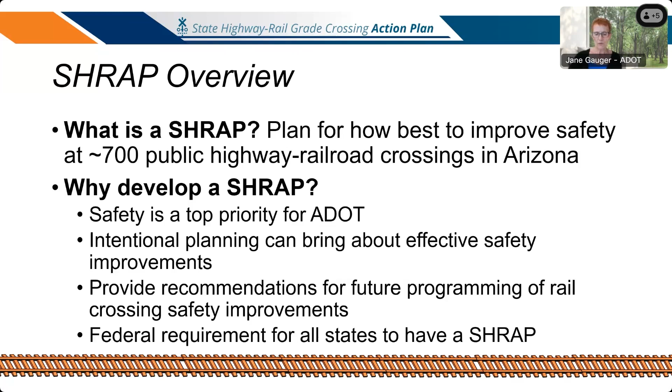So you may wonder, what is a SHRAP? It's a plan for how to improve safety at approximately 700 public at-grade rail crossings in Arizona. It was developed because safety is always the top priority for ADOT, especially related to railroad activities. The plan is designed to bring about effective safety improvements, provides recommendations regarding programming, and helps us determine the annual budgets for projects. It is also a federal requirement, and it must be updated every 5 years, covering safety at all public at-grade crossings in Arizona.

The goal of the SHRAP is to improve safety at public at-grade crossings for all modes of transportation that interact with trains. The objectives are measurable safety items: reduce the number and rate of incidents at crossings with active and passive treatments, reduce the number and rate of crossing incidents for all modes of travel, reduce the number and rate of incidents involving trespassers on the tracks - I'll explain more about trespassers in a bit - and reduce the severity of incidents at locations with reoccurring incidents.

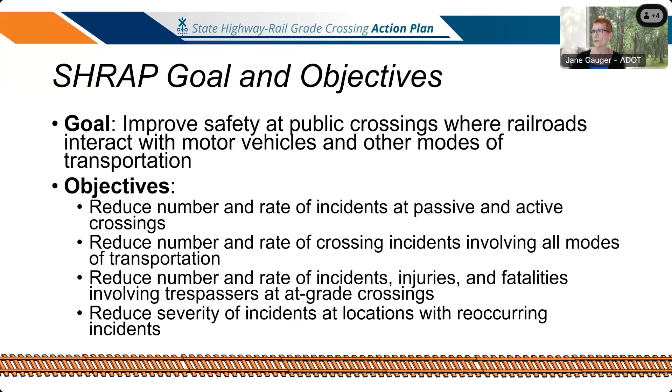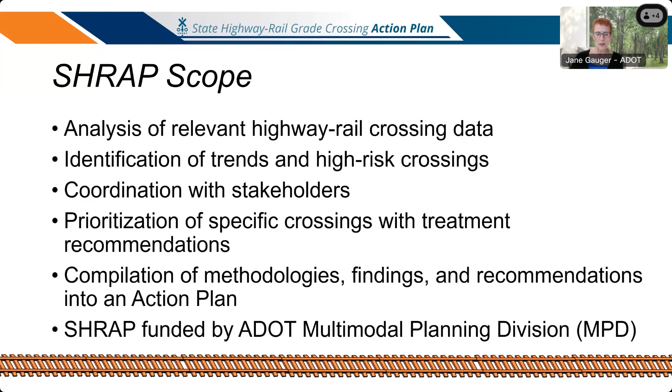To complete the most recent SHRAP, we followed these scope items. We collected and analyzed available crossing data for all crossings throughout the state. After analyzing the data, we identified trends and high-risk crossings. We presented our findings, coordinated with interested stakeholders, and then prioritized the crossings. We made recommendations for improvement, and compiled all the methodologies, findings, and recommendations into an action plan document. The SHRAP was funded by the ADOT Multimodal Planning Division, MPD of ADOT.

So I'm going to talk a little bit about pedestrian safety at railroad crossings, and this is where trespassing comes in. Pedestrians are trespassing, and they pose a safety risk if they walk along the tracks, cross the railroad tracks anywhere other than a designated crossing point, cross when the gate arms are down, or go under or around those gate arms.

These situations present a safety hazard, as trains are huge and really heavy, and they take a very long distance and time to stop. Trains can't stop in time if there are pedestrians on the tracks.

During the 4 years of the SHRAP, there were 14 pedestrian fatalities, all related to trespassing on the tracks. Just in the last 2 years, there's been an additional 14 pedestrian fatalities related to trains in Arizona. And just in the last 6 months, there's been 4.

The FRA is the Federal Railroad Administration. They oversee railroads in the US, and they are concerned, recommending and encouraging states to increase awareness and do safety improvements for pedestrians at crossings. So all across the US, there has been an increase in pedestrian fatalities at railroad crossings. It's a high concern for everyone.

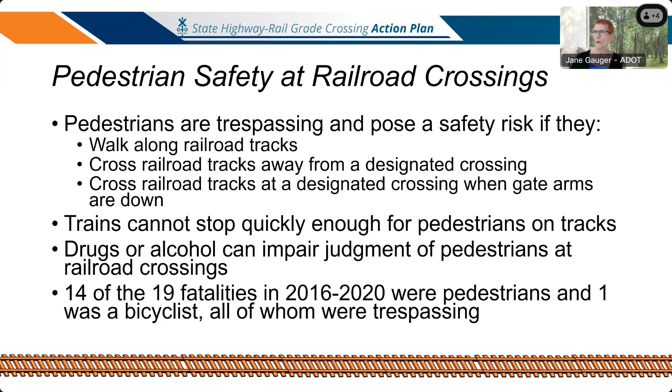This brings us to ADOT Utility and Railroad Engineering. We are the liaison between ADOT and the railroad companies. In Arizona, we have 2 major railroads. These are class 1, they go all across the US, and the trains are really long, now over 2 miles long.

Then we have 12 short line railroads. These are the local rail lines. We have 12 in Arizona, 8 are active, and there's 2 excursion railroads within that 8 count. And then we have 4 that are inactive.

We manage the statewide railroad crossing inventory, which is a requirement, and it accounts for all 700 crossings in the state. We also manage the Federal Highway Railroad Grade Crossing Safety Program. This is Section 130, you may have heard of it. So what Section 130 is, it's a funding program to provide federal money for projects to improve safety at railroad crossings.

It came about from the Highway Safety Act of 1973. During that time, there was a lot of concern from the federal government about the high number of accidents occurring at railroad crossings. So the nationwide funding program was established, and each state has their own Section 130 program that they oversee. The overall goal of the Section 130 program is to increase safety for all modes of transportation, including pedestrians.

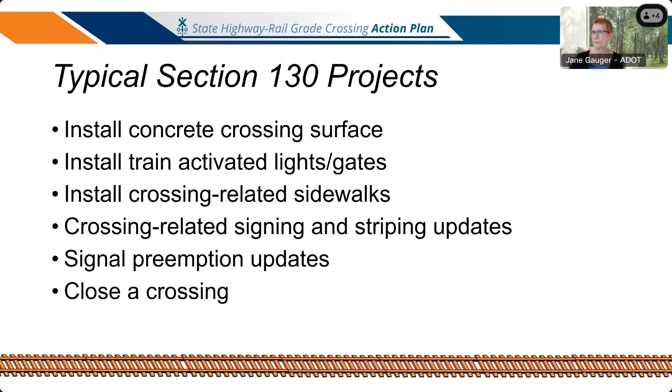Section 130 projects are selected and managed by Utility Railroad Engineering. The SHRAP has been extremely valuable because we ranked each of those crossings and gave them a risk scoring. This helps us determine future projects.

Utility Railroad is responsible for the oversight, coordination, and completion of all aspects of the Section 130 projects. That includes clearances for every federal project - you have to do environmental, right-of-way, and utility clearances, and agreements between ADOT and the railroad, and between ADOT and the local agency, which is the intergovernmental agreement.

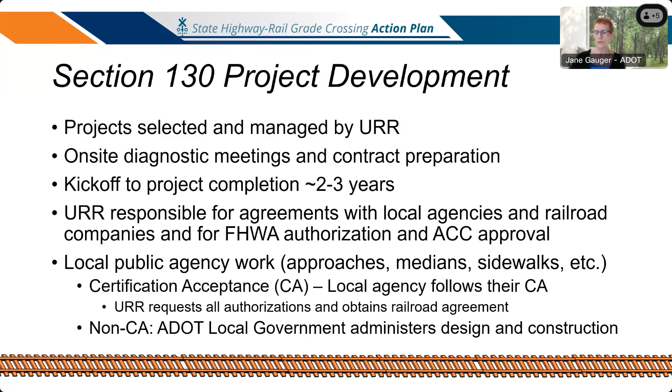We make sure the funding is in place for the project, and we also represent the local agency, the railroad, and the project for a hearing - an ACC hearing. In Arizona, the ACC oversees utilities, including railroads, so we have to go to a hearing to get approval to do any changes to that crossing. We take care of that.

This is an example of a Section 130 project - 35th Avenue and Harrison Street in Phoenix. The railroad does their own construction work, so they installed gates, cantilevers, and flashing lights.

The city of Phoenix did the civil work. They installed the concrete center medians, which allowed for an additional gate arm to be installed, and the railroad did that. But the city did the concrete, the sidewalks, the ramps, the signs and the striping. Typical duration of a project like this is 3 years; if it's more complicated, it can go longer.

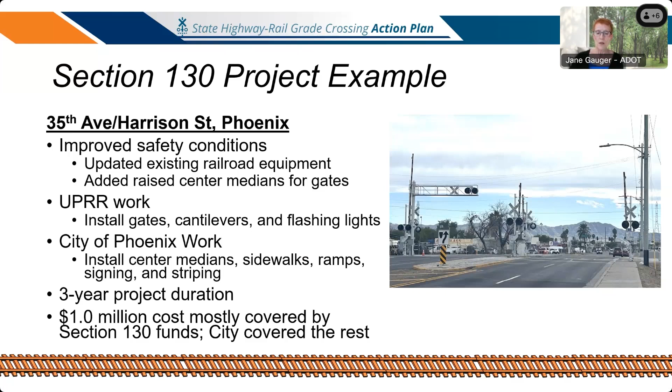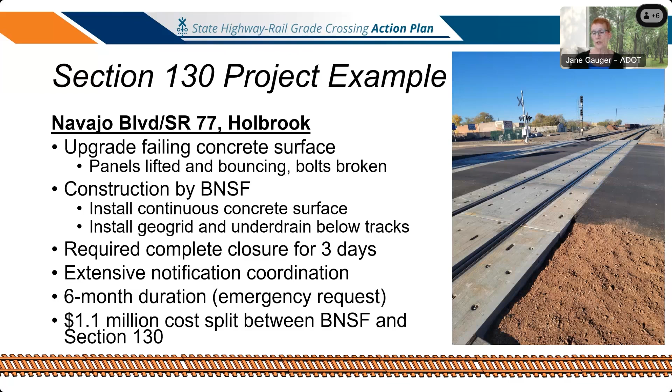This is a nice picture of what the concrete panels look like on that concrete surface. In this crossing, the surface was failing and they did not think it was going to last through the winter, and this is the only crossing for about 180 miles, so they needed to close the road for 3 days. Extensive notification and coordination allowed us to complete the project in 6 months at a cost of just over $1 million. Very successful project.

This shows the Central Yavapai Metropolitan Planning Organization's map, and we have one project, one crossing in your boundary. We just completed a Section 130 project here, and I have some photos.

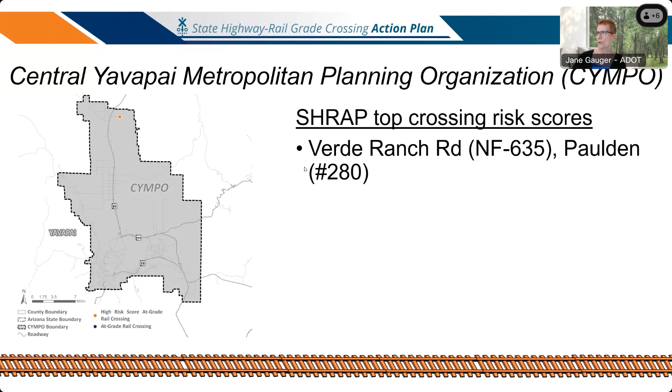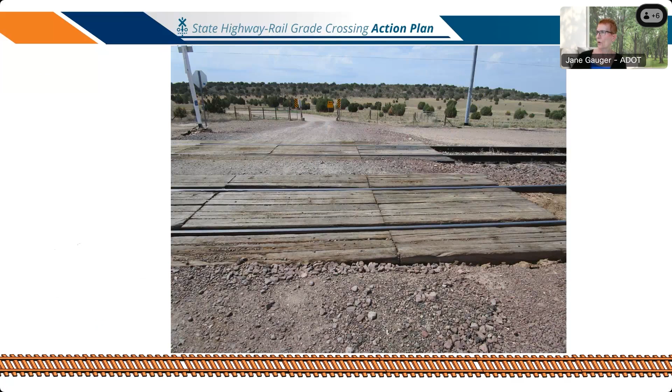This is Verde Ranch Road, east of Paulden. This is what the crossing looked like before - it was gravel surface, very narrow, with old timber surface. This shows how narrow it is - you couldn't even get 2 lanes to go through together, and the cattle guards were very narrow too.

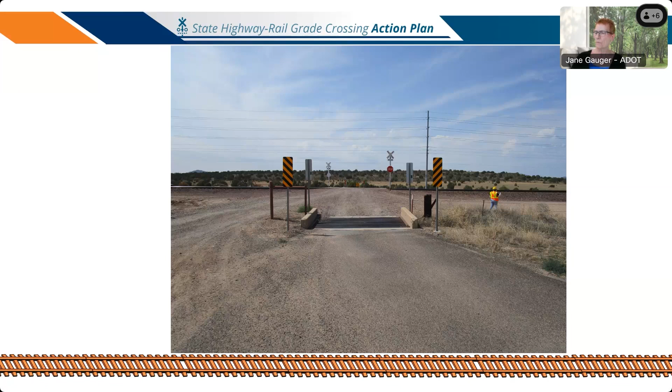We worked closely with Yavapai County and BNSF Railway. There are 2 tracks here. First the BNSF Railway came in and installed the concrete surface, then the county followed up afterwards. They widened the road to 2 lanes, one lane in each direction, did the asphalt surface, and did the signing and striping.

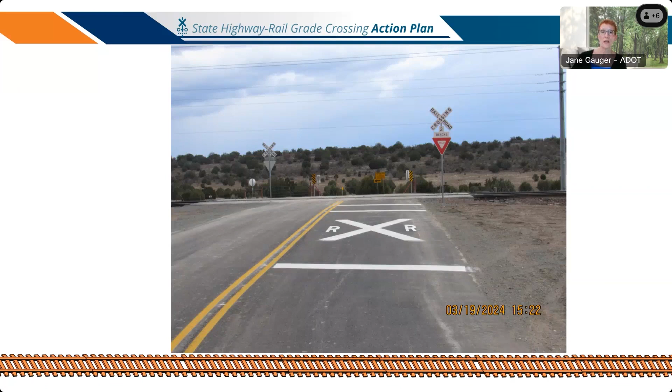This shows a little bit farther out - they replaced the cattle guards with wider cattle guards. This crossing has a lot of truck traffic; the road leads to that Upper Verde River wildlife area, so it really did improve the safety of the crossing. The county was extremely helpful and really good to work with. Excellent project, and this was just completed in about April, so just a few months ago.

In closing, as you travel throughout the state and beyond, be safe out there. If you have any questions about the SHRAP, ADOT Utility Railroad, or Section 130 program, please feel free to contact any of us. Thank you so much for your time.

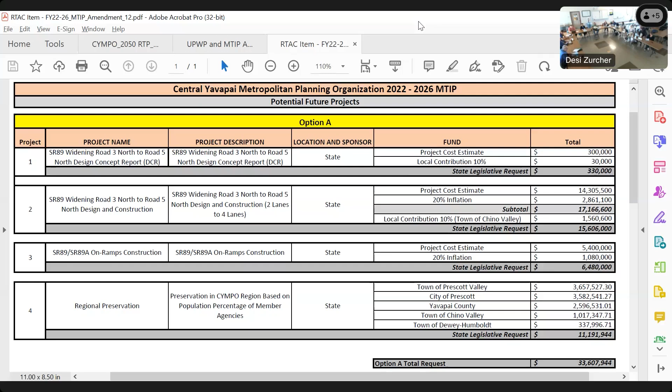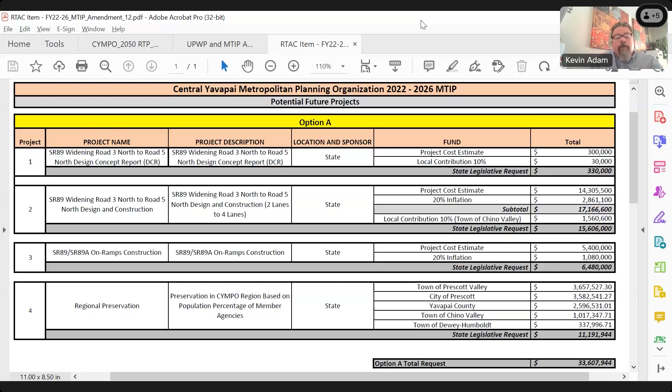Yes. And Mr. Chair, the only other thing I would add is that because the majority of your projects are on the state highway system, I would ask that CYMPO coordinate with ADOT, probably the district office would be most appropriate, to make sure that the scope of the project and the appropriation amount we're pursuing is realistic from ADOT's perspective. Okay, thank you for that info, Kevin.

All right, to revote on that. So once we did the amended motion and it was seconded, all in favor say aye. All opposed, say nay. The ayes carried. Okay, thank you, Kevin.

Moving on to item 7: review and discussion of possible action to recommend approval to modify the 2050 Regional Transportation Plan scope of work.

Brent: Thank you, Mr. Vice Chair, members of the committee. As you are aware, over many meetings we have discussed the boundary expansion of CYMPO. The executive board recently took action confirming that we will be taking in basically the base map plus option B to the south and west, over to I-17 and up to I-40. That created a disparity in the scope of work we had created for the RTP 2050. We did not scope that planning process, our major plan document, to include that area until the board took its official action. So this item and the backup in your packet outlines Kimley Horn's adjustment to the scope of work for the RTP 2050 in the amount of 70,000 and change.

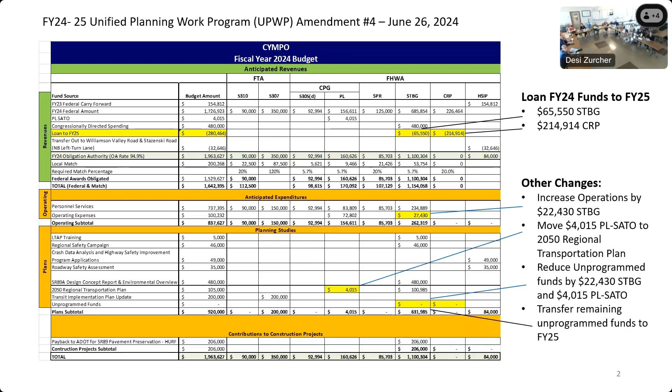Then go back down one page -- this is just fiscal year 25, doing the same things, adjusting our operations budget based on projections we know now. Including, Frank, I think I told you fiscal year 24 for the RTP funding -- it's fiscal year 25. So all of that's there.

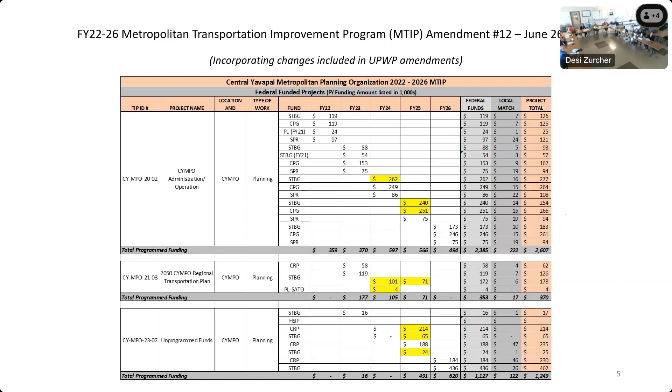Going into all the details, I can answer any questions anybody has, but that's the work program. And then if you go down one page, those changes are reflected in our TIP.

And then lastly, go down one more page. Here we're including all of the awards that our human service providers within the region have received from ADOT -- their 5310 and 5311 transit dollars that we're required to include in our report annually. I'm happy to answer any questions. Thanks. Any questions for Allison? All right.

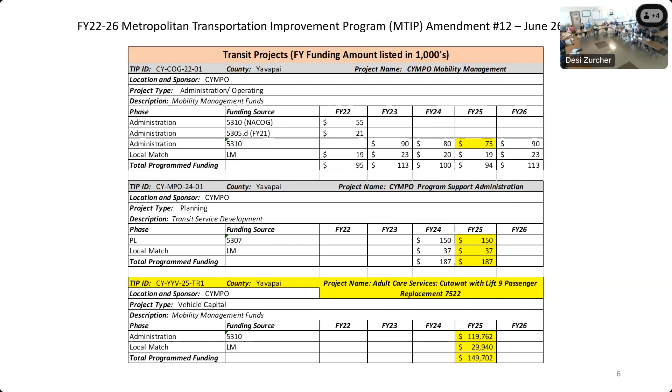Can I get a motion on this one? I'd like to make this one, this is my favorite one. I make a motion to recommend the executive board amend the FY 2024 Unified Planning Work Program, the UPWP, and the FY 22 to 26 Metropolitan Transportation Improvement Program, the MTIP, as presented.

Second. Okay, there's a motion made and seconded. All in favor, say aye. Aye. All opposed, say nay. Ayes have it. Okay, thank you so much. Thank you, Allison.

We'll move on to item 9, regional development update. Michael? Sure, yes, because I put this there.

I think Vinny was hoping, Vice Chairman, that I would share a little about the Regional Trails Initiative and some additional interesting information about regional transit. As many of you know, we're focusing on our regional conservation plan, which is the brainchild of Vinny and the town and city and county managers. One item I'm focused on is the creation of a regional trails plan, the idea being that we should increase connectivity and pursue serious goals with regional trails, whether connection and accessibility, user friendliness, safe and secure trail systems, and collaborative management while maintained.

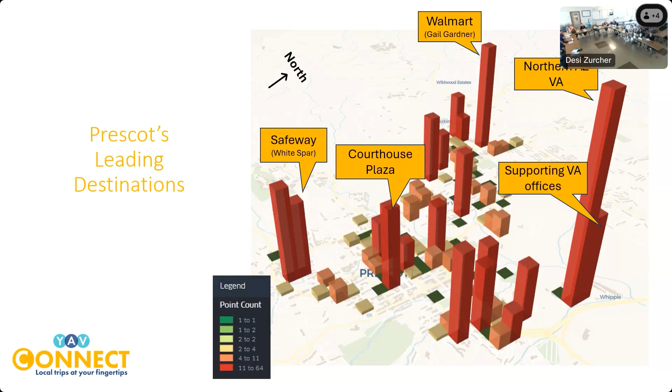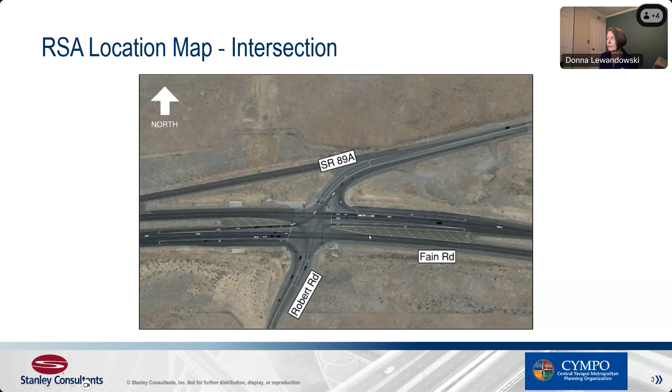So when we looked at this, we broke it into two sections. We did separate analyses for the intersection and then the corridor, because the crash types were just so different. We wanted to be sure we were looking at things without commingling, having things separated out for you. So this is the intersection we were looking at. This is 89A, and the corridor goes on up this way to the northeast. And then this is the entire corridor, starting at that intersection we just looked at, all the way up to the corridor end, which is just past that cattle guard up there.

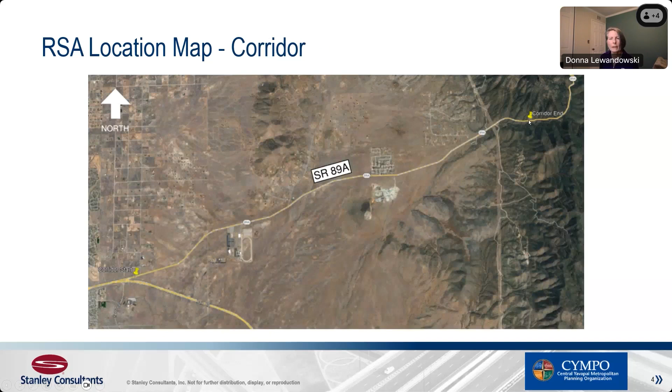And then we looked at the residential land use along the corridor, because it looks like you've got quite a few houses and housing tracts coming in along this area, which is going to increase the number of cars as well as the time of day usage and things along the area. So we wanted to have a fair idea of where those were going in and what the usage was.

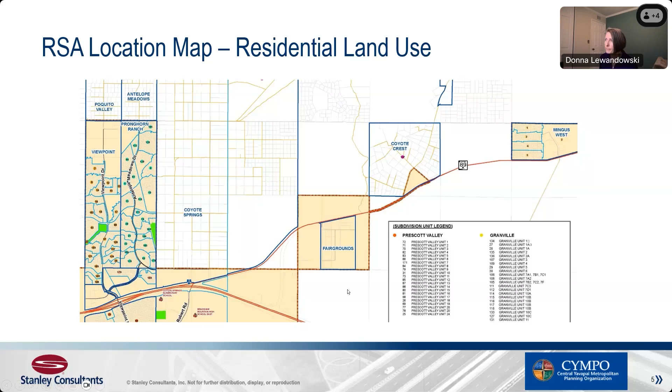We held the startup information meeting briefing, just asking really what was the purpose of this? Why did it come up on your radar? What are the things you're seeing out there now that seem dangerous or are causing crashes? And this is a list of what we learned. Mostly it was about the high speeds coming down off of Mingus Mountain out of those switchbacks, and that the lack of passing lanes coupled with slow vehicles and maybe tourists coming out of that area leads to frustration and maybe some unsafe passing.

Much of the corridor not having shoulders and the edge of pavement drop-off, recovering from a lane departure was challenging. One of the other things that we found is that there were 3 prior RSAs in the area.

ADOT looked at the intersection back in 2021 and 2022. Town of Prescott Valley asked ADOT to lead one on the intersection itself. And the entire corridor was looked at in an internal ADOT RSA, literally right before we did ours. You can see a quick summary of those prior RSAs in the full report if you're interested.

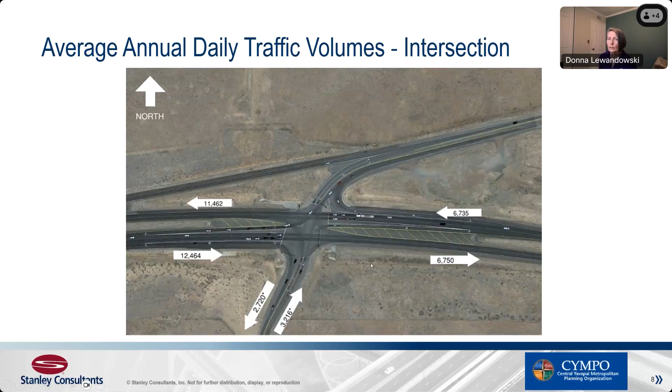Talking about just the intersection now, here's the annual average daily traffic volumes that we were seeing. Not too high yet, but you're going to see a lot more starting to come in on this corridor once those housing developments get built up. Your turning movements, again, are not terribly high in that area as of yet.

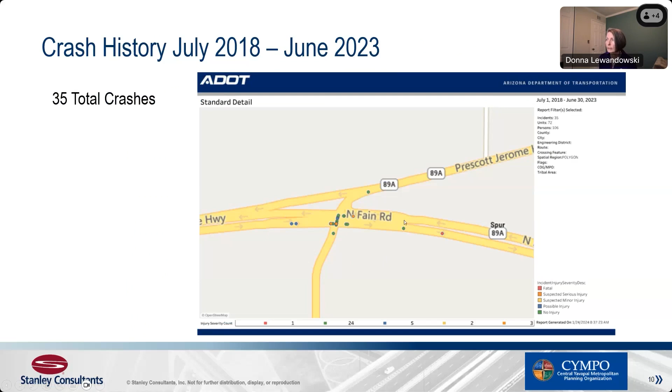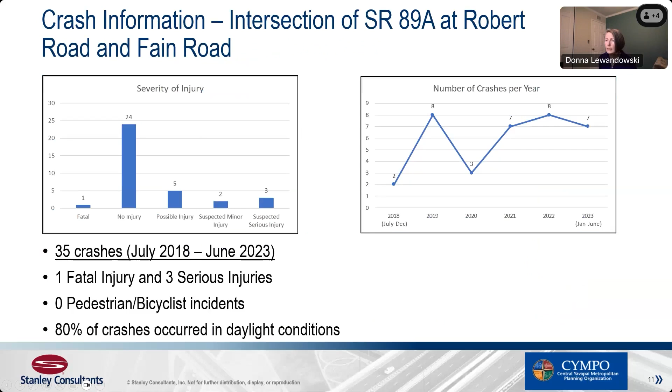Crash history from July 2018 to June 2023, the most recent 5 years that we had, there were a total of 35 crashes attributed to the intersection itself. There was 1 fatal injury, 3 serious injuries, no pedestrian or bicyclist incidents, and 80% of the crashes occurred in daylight conditions.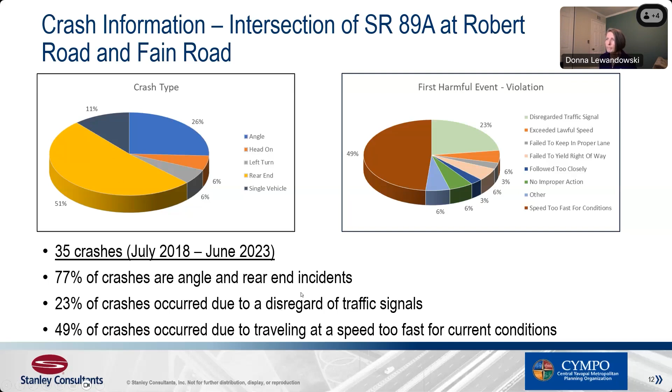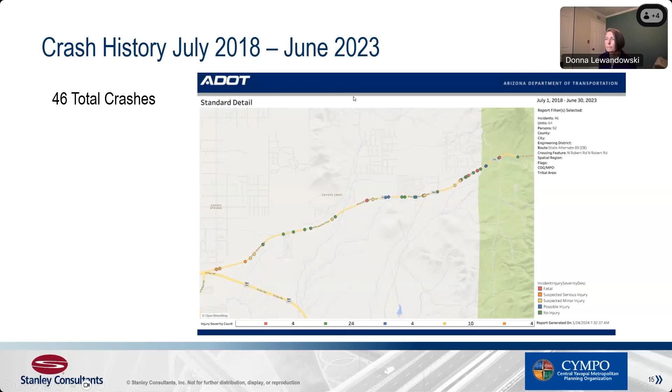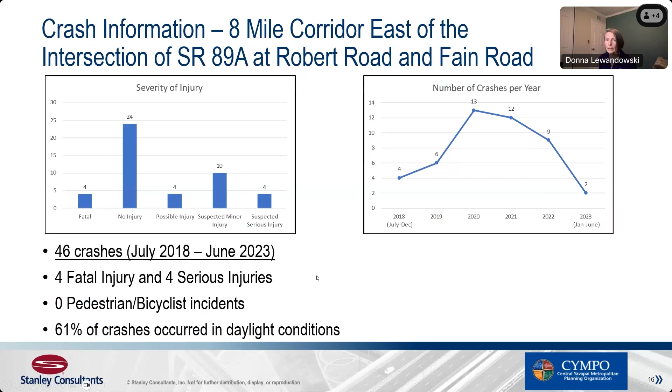Of those 46 crashes, there were 4 fatal injuries and 4 serious injuries. Again, no pedestrian or bicyclist incidents. 61% of those crashes occurred in daylight conditions, so slightly less. That tells you something's happening out there. The lighting was good for the area, but it's still very rural lighting, so it's not a very well-lit roadway there.

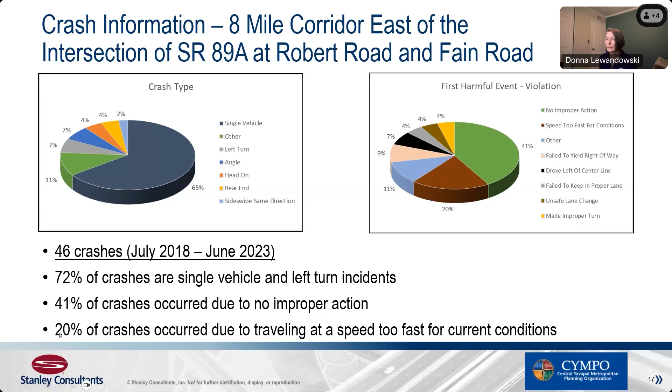72% were single vehicle and left turn incidents. 41% occurred with no improper action noted. That makes me a little suspicious, but they weren't able to determine what was the improper action there, at least. Then 20% of crashes were, again, traveling too fast for current conditions, and that's a nice low number to see. So that was actually a little bit good.

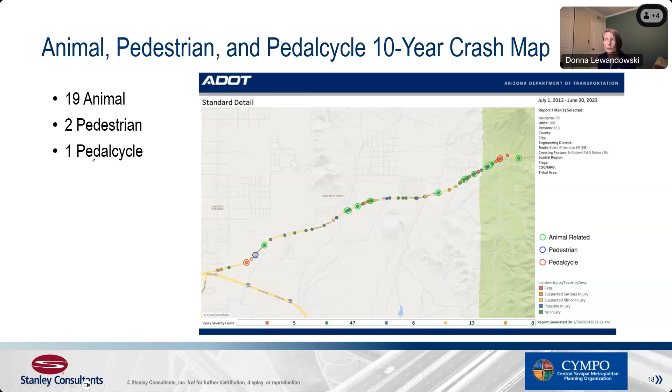There were 2 pedestrian and 1 bicycle crash incidents in the prior 10 years.

So, yeah, was that a question? Nope.

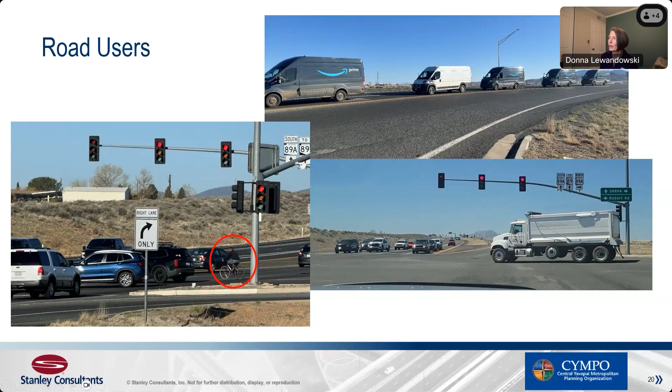What we saw when we were out there. We just wanted to give you an idea of some of the road users that we saw out there. Lots of these heavy duty trucks coming out, I guess there's a plant out there, so we saw quite a few of these. We did see a bicyclist, and then we saw 2 more because both Mike and I rode the corridor. He was out there kind of mixing it up with traffic all by himself. And then we've got this strange little train of prime trucks that we thought was kind of fun.

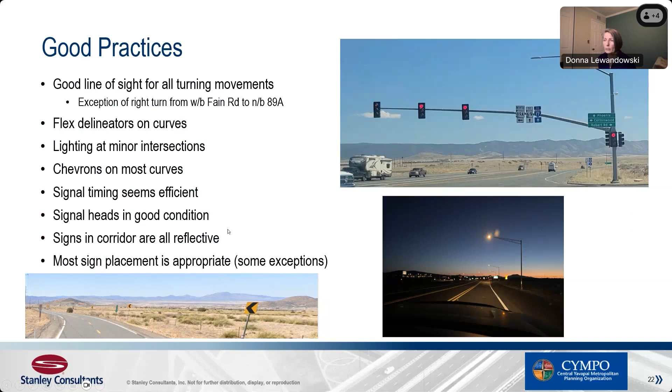Lots of good practices going on out there, right? There's good line of sight for all turning movements, with one exception, which I'll talk about a little bit later. We like the use of the flex delineators on the curves. There was good lighting at the minor intersections all along the corridor, which was really nice. The chevrons on most of the curves were there. Signal timing seems like it's working and the signal heads are in good condition. The signs in the corridor are all reflective and not in poor condition at all, and most of the sign placement is appropriate to what's coming up.

So we did use a safe system approach when we were looking at these, trying to make sure that we were approaching this from this safe system approach. If you haven't heard of this, it's probably worth looking up. Basically, it seeks safety through vehicle and roadway design and operational changes, rather than relying primarily on behavioral changes.

What we found is we can tell people to slow down all we want, we can put up all the signs we want, we can put police out there, and we're still not seeing behavioral changes. So we're trying to change the environment so that those slower speeds we want are supported, so that the behaviors we want to see are inherent in the roadway and the obvious way to do things.

It seeks to fully integrate the needs of all users. So not just looking at vehicles out there, but also making sure we're considering pedestrians and bicyclists, the needs of older drivers, younger drivers, non-drivers, the disabled, and everyone else who needs to use the transportation system. And then we also recognize that users make mistakes and bad decisions.

We can usually anticipate what those bad decisions and mistakes are going to be. And what we want to do is reduce the opportunities for those bad decisions. And if they occur, we want to make sure they don't result in a fatal or serious injury to the driver. We want to reduce the seriousness of making those mistakes.

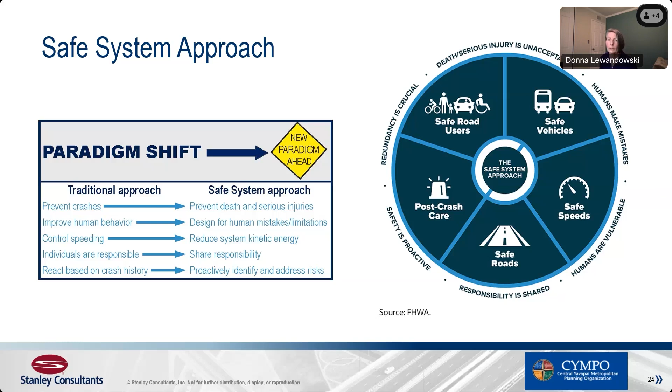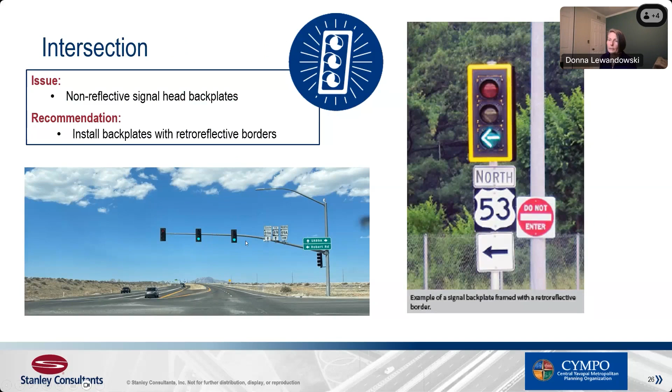So looking at that, here's what we came up with, breaking it into intersection and corridor. You don't have reflective signal head back plates. Quite a few of those crashes were ignoring or going against the traffic signal, possibly because they weren't easily seen. This is something that could help, and it's a very simple mitigation effort.

The approaches on westbound Fain Road and eastbound 89A are really, really wide, and the medians end well before the intersection. So what we suggest is hardening and bringing those all the way up to the intersection so it visually narrows the corridor as you come in, rather than the road getting very wide at those intersections — the wider the road, the more it encourages speed.

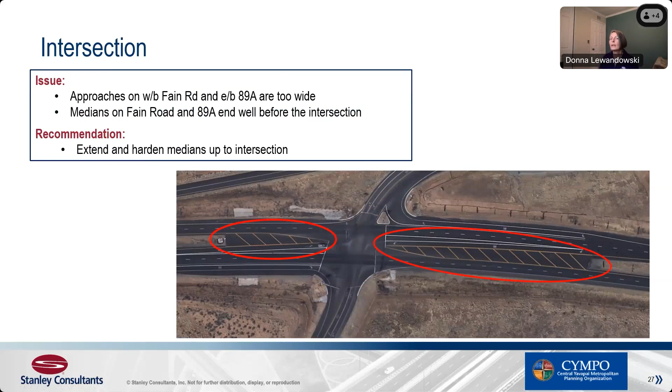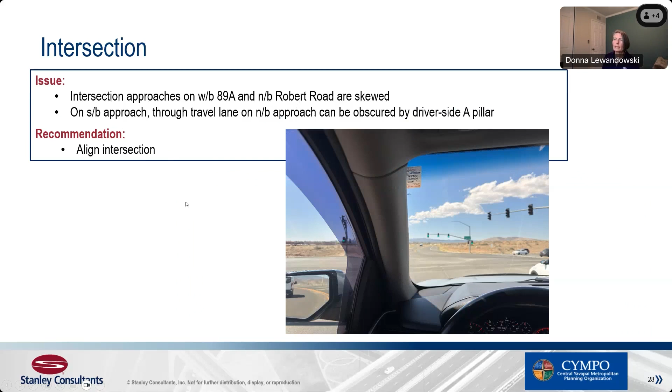The intersection approaches on westbound 89A and northbound Robert Road are a little bit skewed, and the only place we really saw that as a problem is on the southbound approach — the through travel lane on the northbound approach can be completely obscured by the driver's side A-pillar. We couldn't see who was there at all. I know the intersection was skewed a little bit; realigning that intersection would be a costly but very effective countermeasure to that.

The slip lane from westbound to northbound has a really poor sight line. If you're trying to make that merge, you don't realize as you go around that corner that the merge happens very quickly. You don't have an acceleration lane or a merging lane, and you cannot really see northbound vehicles coming up from the southbound entrance because of vehicles sitting at the stoplight, so you can't really see around them.

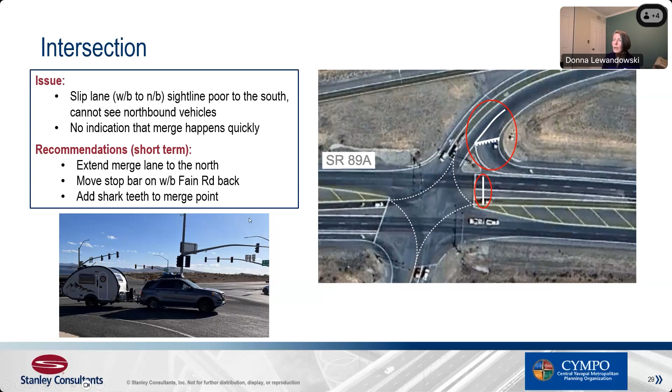You can see they pull out really far trying to see back to when they can merge. So our short-term recommendation is to extend this merge lane to the north as far as possible, move the stop bar on Fain Road back to increase the sightline distance, and add shark teeth to this merge point so people are clear they're going to merge right there. The long-term recommendation would be to completely realign that right-hand turn and pull it away, making a true acceleration and merge lane out of it.

We saw a lot of this: drivers using their shoulder on the northbound approach to make right turns. There's plenty of room there, so just restripe the road to create a dedicated right-hand turn lane, and that will solve that problem.

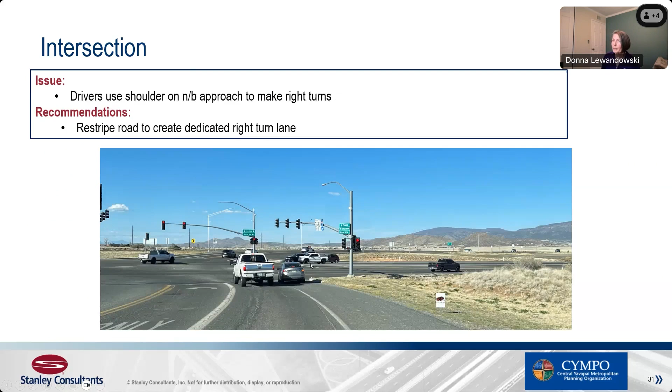Due to the skew, the northbound left and through lanes don't line up. This would probably be a place for skip striping just to show drivers exactly where in the roadway they're moving.

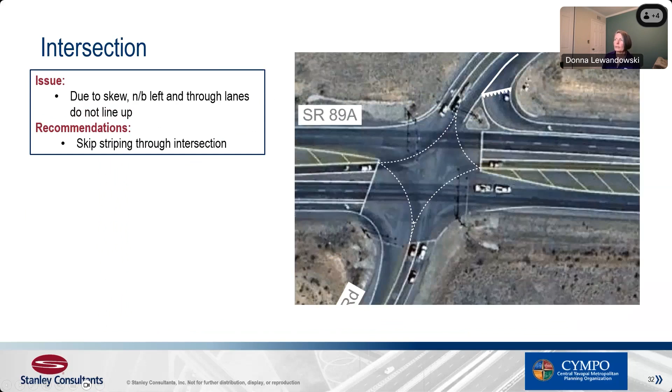When we looked at the corridor, we broke it again into two different areas. The first thing we wanted to do is look at the single vehicle and lane departure crashes — that was the major problem we saw in the crashes, and we wanted to address those separately. One problem is the pavement is really in very poor condition along a lot of the corridor, which makes handling and controlling the vehicle a little tougher. The recommendation is to really repair the pavement.

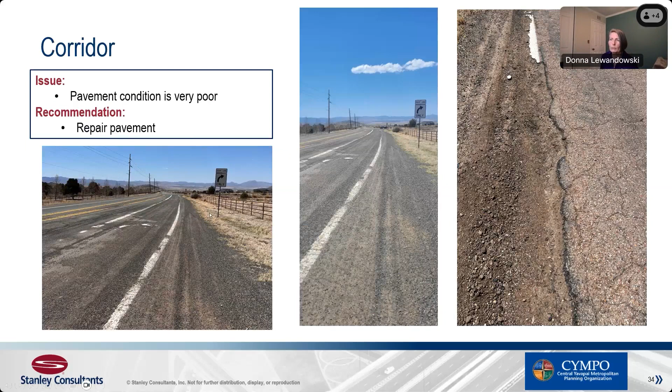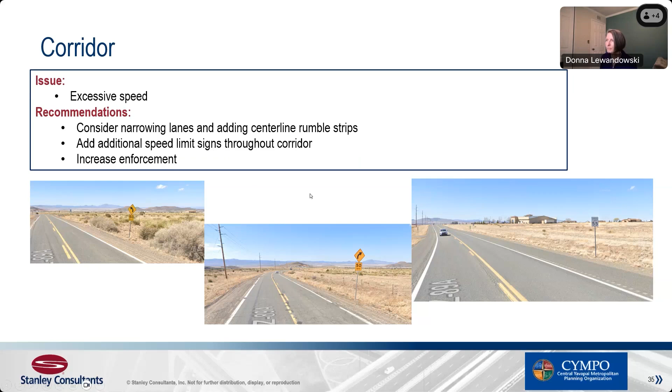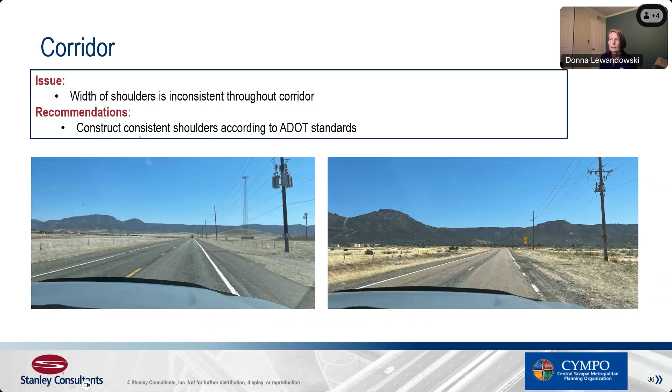There's inconsistent shoulder width throughout the corridor, making breakdown lanes and things like that a little bit difficult. It would be good to go through and just make sure the shoulder width is consistent and according to ADOT standards.

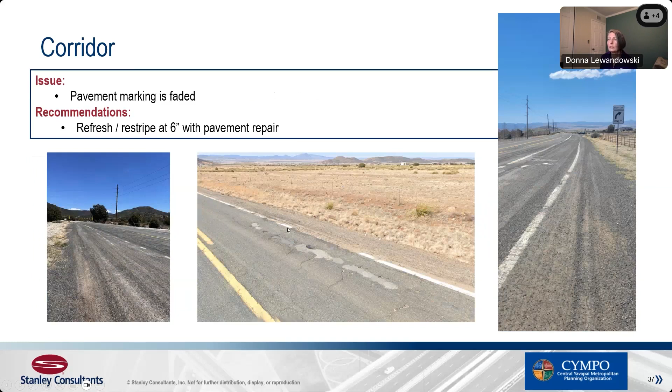We saw a lot of faded pavement marking. It really just needs to be restriped, and we suggest a 6-inch edge line stripe to really delineate the roadway.

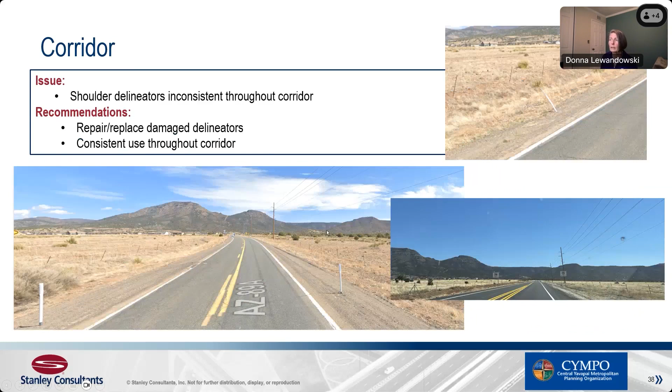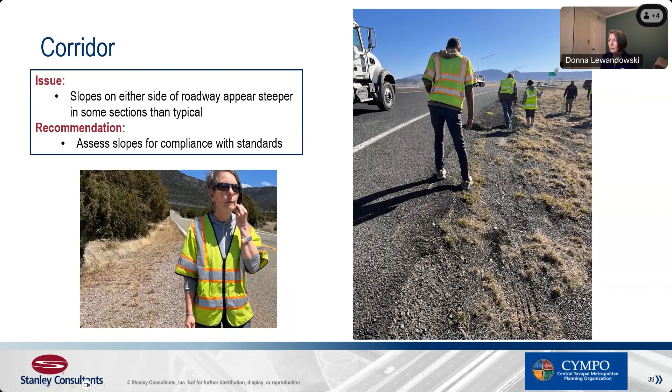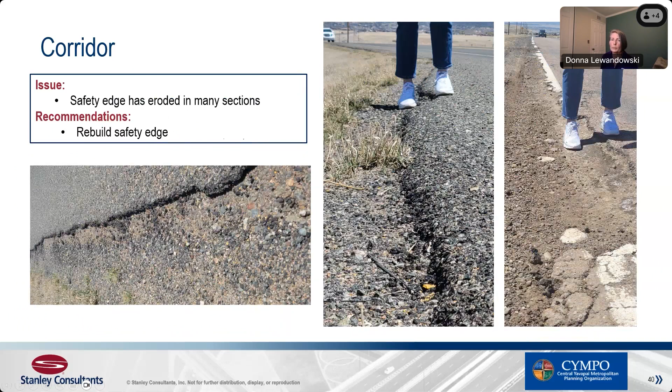The slopes on either side of the roadway appear steeper in some sections than typical, so it's probably worth going through and assessing the slopes for compliance with ADOT standards. That's different than the safety edge, which has eroded. It was there, and that's a really important countermeasure, but it's eroding and becoming a little too steep to be a safety edge. So the whole corridor should be gone through, assessed, and rebuilt.

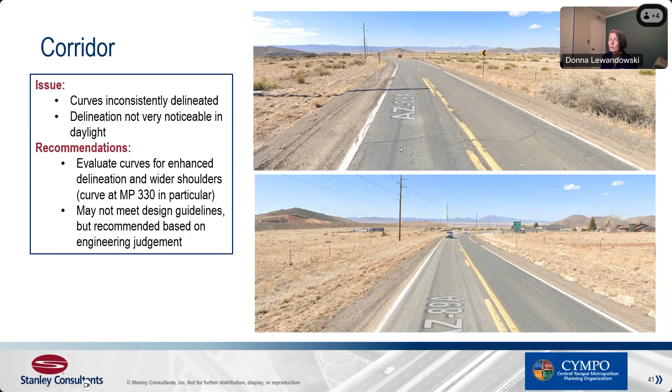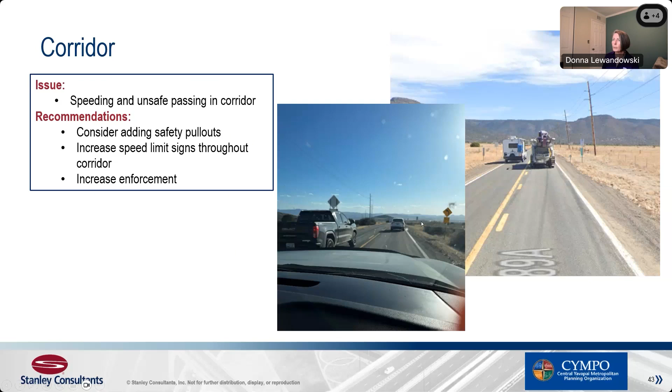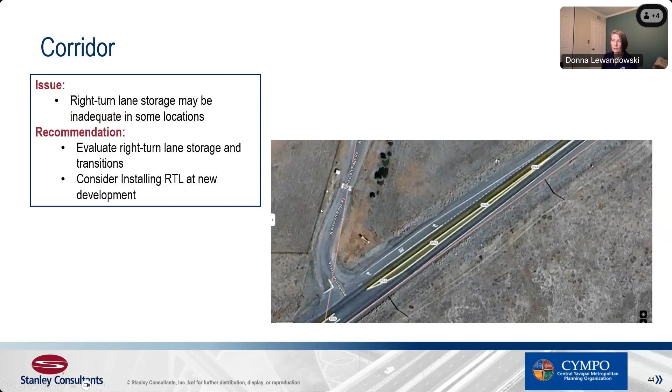We noticed that the right turn storage might be inadequate in some locations, and that might particularly become more of a problem as that area gets built out with more homes. So you might want to go through and evaluate the right turn storage and transitions, and install a right turn lane at the new development.

And then, because I'm a cyclist myself and we look at all road users in the safe system approach, we did ride the corridor and we have some recommendations for you. That's me and Mike.

So there's no pedestrian facilities or bicycle facilities at the intersection or through the corridor. We did see one very brave cyclist out there without a helmet going through the corridor. He was coming southbound and heading into town, going straight across that intersection. So you're going to see more people who want to do that - the more people who live out there, the more people are going to want to come into town some other way besides using a vehicle.

The shoulders are not always there. When they're there, they're not always rideable, not always wide enough. The rumble strips - I got caught on the wrong side of the rumble strips and could not get back over for several miles in one instance. And they are not the new standard of bike-safe rumble strips. The high speeds just make this a stressful, difficult corridor to walk through. There are no ADA accommodations at all.

There's enough room along the northwest side of that roadway to put a shared use path. That would be the preferred recommendation. It would get people away from fast moving cars, both on bicycles, and allow for ADA accommodations and people walking to get into town. There's a great little pathway system right in town if you could only get to it. So as people move out there and that gets built up with residential, you'll have a lot more people wanting to do that to get into town to reach that other pathway system.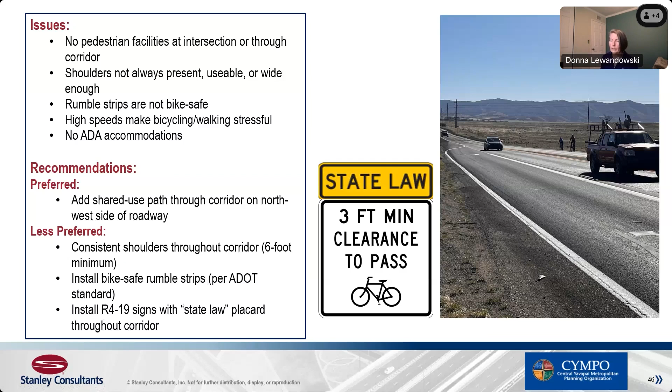We were passed several times very closely in areas where there was no particular need to stay that close. It wasn't like there were two vehicles passing or anything else. So a reminder that they do need to give bicyclists safety would be a useful thing out in that corridor.

When we were going through this, I want to call your attention to the Safe System Roadway Design Hierarchy. This is a publication that just came out last year. It's a tool that characterizes engineering and infrastructure-based countermeasures and strategies and relates them to alignment with the safe system approach. The purpose is to help transportation agencies and engineers identify and prioritize countermeasures and strategies when developing these transportation projects. The four tiers here are in order of alignment with the safe system approach.

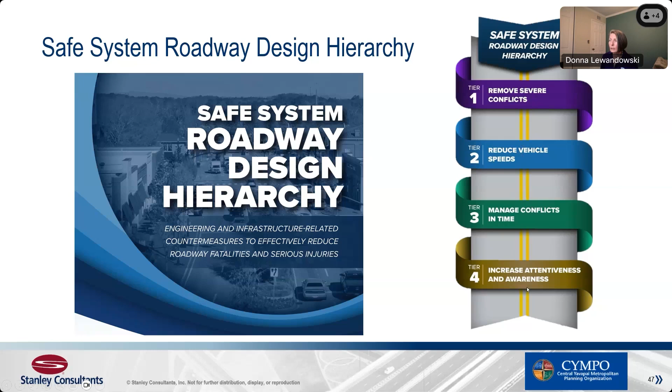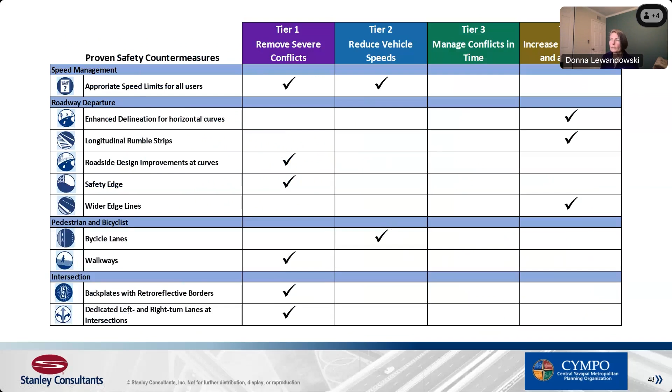If you can remove severe conflicts, that's your number one go-to. If you can't do anything to remove the severe conflicts, then try to reduce the vehicle speeds through the corridor. If you can't reduce the vehicle speeds, or in addition to these, you also want to manage conflicts in time. And then in your last tier, the least effective, is to increase attentiveness and awareness. We've gone through, and these are the proven safety countermeasures that we suggested in the roadway, and you can see where they line up with the different tiers. We didn't give you any managed conflicts in time—that's usually something like leading pedestrian intervals and things like that, which are not useful in this corridor. But you can see how these line up with those tiers.

Questions, comments?

Yes, so just want to be clear, doesn't look like it warrants a grade separation from what you studied or anything like that? For pedestrians and bicyclists, or grade separation for vehicles? For vehicles. That's a very, very, very costly countermeasure. And for the AADT that's out there, I think it could be mitigated without doing that.

All right, Ian? Yeah, I had a question. When I drive that intersection, and when you see some of the photos—most of us have been out there—that intersection has some of the largest distances across it between where the vehicles are sitting at stop bars and the indications. When you do these RSAs, do you ever look at those distances in regard to the MUTCD? There are maximum distances for placement of signal equipment. I was just curious because you mentioned back plates and things like that, but I would recommend you look at those sorts of things too, because some of these distances might be 150 to 170 feet between the driver and the indications. So yeah, they're really far.

So to the signals? Yes. Yeah, because we didn't do that for this one. It didn't seem on obvious glance to us that the signal heads out there were too small. It's probably on the cusp of what you're saying to require larger signals, but before I went through and did that, I would just try getting those retroreflective backplates up to see if that does enough to bring people's attention to it. Gotcha, okay, thank you.